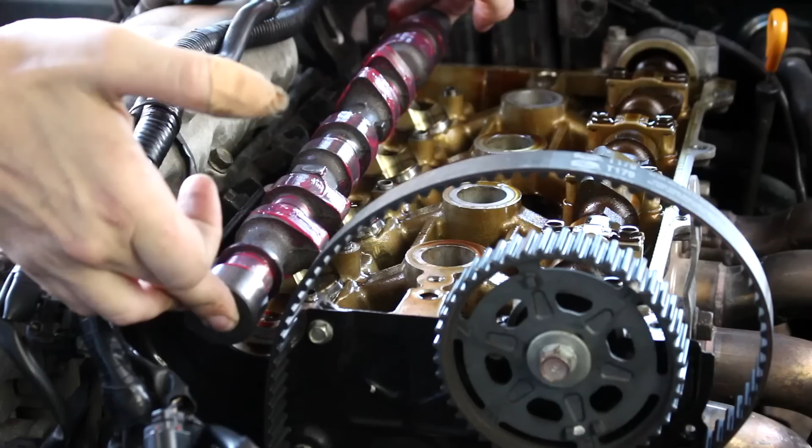So today we're testing the Exhintake cam swap, adjustable cam gears, a Squaretop intake manifold, and I have some trickery to do with a new intake after my eyes were opened and my brain was blown by the unicorn intake from last time, making an extra like 4 or 5 wheel horsepower. So we're gonna test out all that stuff today.

My goal, and it is lofty, I'm fully aware of that, is to walk off this dyno at 155 wheel horsepower. Last time I rolled off the dyno, it made 136. The reason I want to shoot for 155 is, number one, I believe this thing is a true factory freak. I know it can do it, but the Mazda Speed Miata from factory made about 153 to 155 horsepower at the wheels on a Dynojet, which is the same dyno I'm using today. So if this thing could match the factory horsepower of a stock Mazda Speed Miata, which is factory turbo for you guys that don't know, that would just be sick.

So yeah, without further ado, let's get into another long day of doing pulls.

All right, so we're getting ready for our first power pull of the day. Oh, who left the compressor on? Where is that thing at?

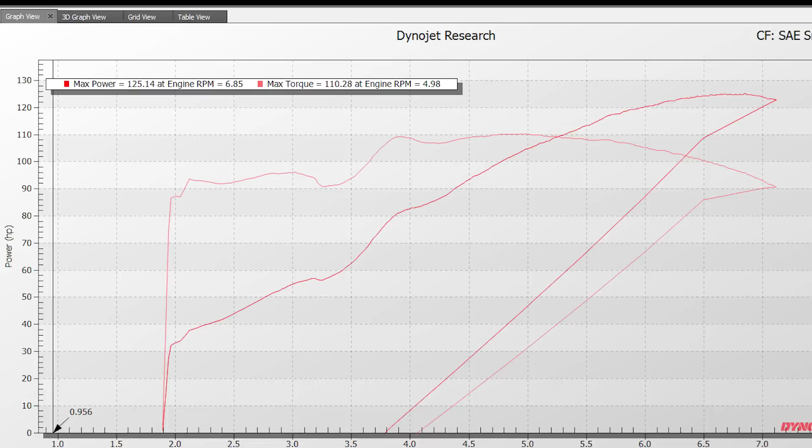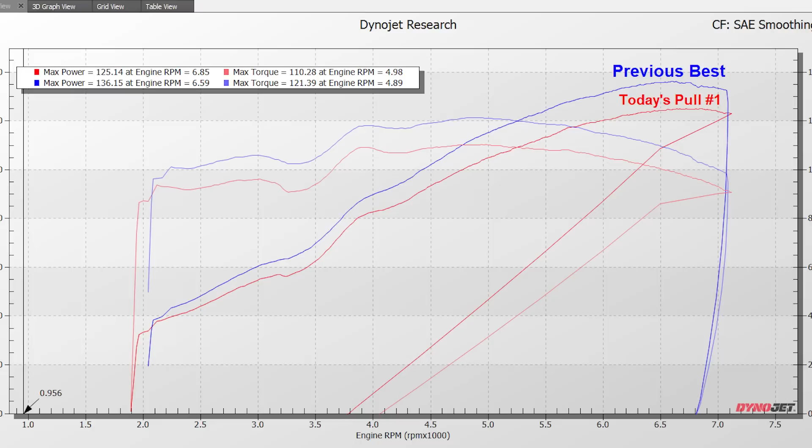So we've got a little bit of an unexpected turn of events. I was hoping to see a 6 to 8 horsepower gain just from throwing in the Exhintake cam. And what we've got here is actually a loss of about 11 horsepower and 11 pound-feet of torque at the wheels. So, as I said, nothing in the tune has changed since last time.

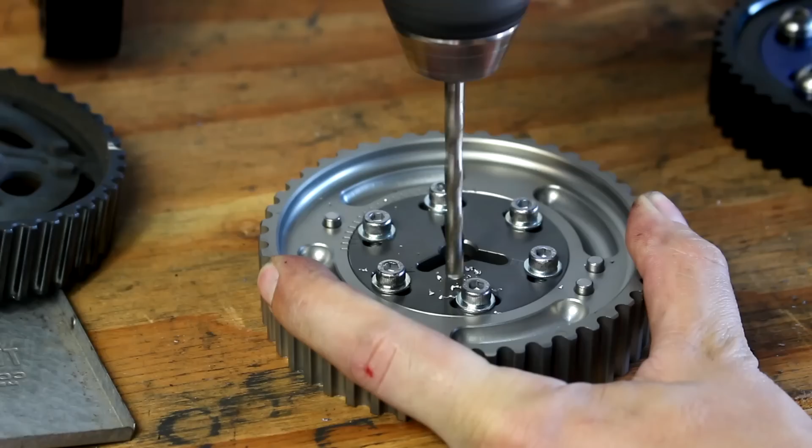So there's a couple things that could be going on. Number one, the motor could be dying. It's always a possibility, although highly unlikely. The other thing that could be going on that I'm leaning towards is, even though the cam gears are supposedly zeroed out, there are 2 variables that could be affecting this. As I showed in the cam gear installation video, I had to drill the intake cam gear for the Exhintake cam. So if I'm off by a few degrees on that hole, that will definitely affect the power.

The other thing is, on the OBX cam gear, it seems pretty generic to me. I don't think it's super R&D'd for the Miata. If this were to be off by, say, half a tooth or something, the factory exhaust cam could be advanced or retarded, which could also cause this loss of power.

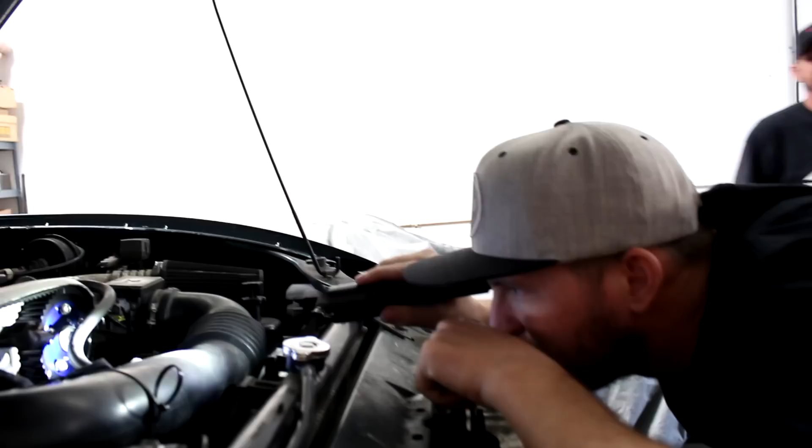All right, no need to be alarmed here, but after these initial results, the first things we wanted to check before making any adjustments were the things that could have changed during the recent installation of parts. So we checked the timing belt just to make sure that I had set it up properly, and also checked the base ignition timing, which, even though I said it once, just wanted to double check that to make sure nothing funky was going on there. And we didn't find a problem with either of those items.

So even though I wanted to save the cam gear tuning for the last part of the day, if the cam timing was messed up to begin with the installation of these gears, I had to fix it right up front. So I started playing with cam timing. Kind of the point of buying adjustable cam gears is that you really need to bring it to a dyno to tune them. The only part that sucks is I really don't know exactly how much power the Exhintake cam is gonna add once I start playing with the timing. But it seems like the timing's already been played with because it seems off, unless the motor's dying.

All right, so let the cam gear tuning begin. Now, since these gears are not marked with any numbers of degrees or anything, the system I came up with to help explain what I'm doing is: if a cam is advanced as far as the gear will let it go, I'm gonna call that 100% advanced. If it's halfway between 0 and fully advanced, I'm just gonna call that 50% advanced.

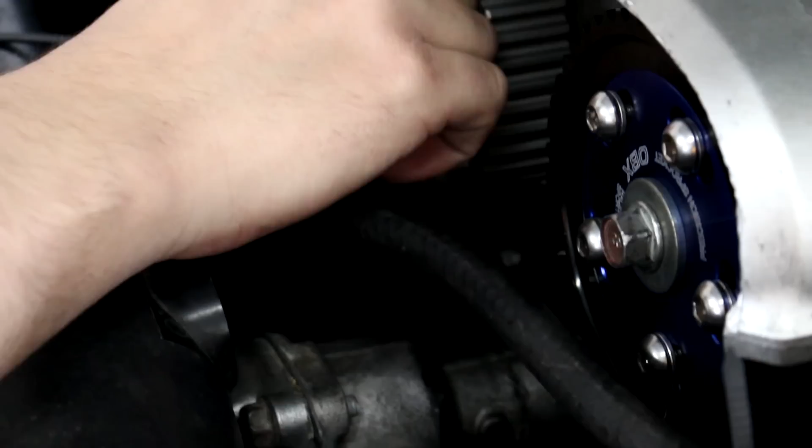So I'm gonna do several pulls here with the cams at various positions, and then I'll pull all the dyno overlays up and I'll explain what exactly happened. Something I didn't really notice at first, but I'll get into more later in the video, is when I would do repeated pulls, the car would gain a little bit of power each time. And it's not like the engine was cold on the first pull, it was fully warmed up and it would gain 1 or 2 horsepower every time.

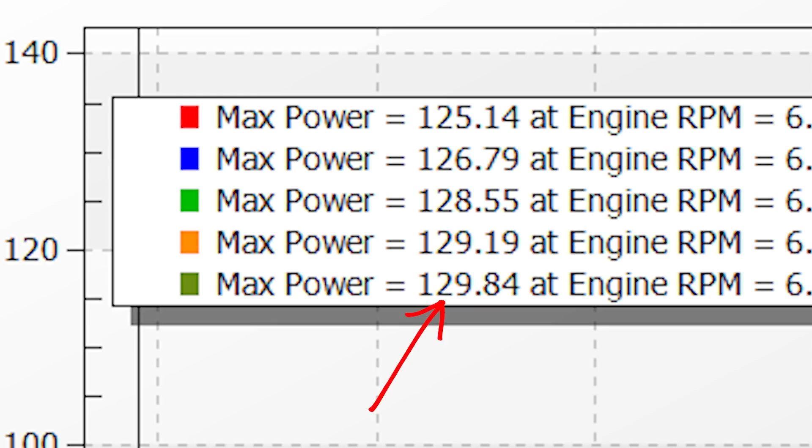So even before I touched these cam gears, the car did do a 129 wheel horsepower pull, but obviously that was still much lower than I was expecting. So let's jump into these cam gears and see what happens.

This thing's gonna sound probably pretty choppy when I fire it up right now. I'll get a little sound clip. I think it's gonna have probably a little beefier mid-range, but I don't think it's gonna do much for the top end. But hey, what do I know? I lost 7 horsepower by upgrading the cam already, so there goes my credibility.

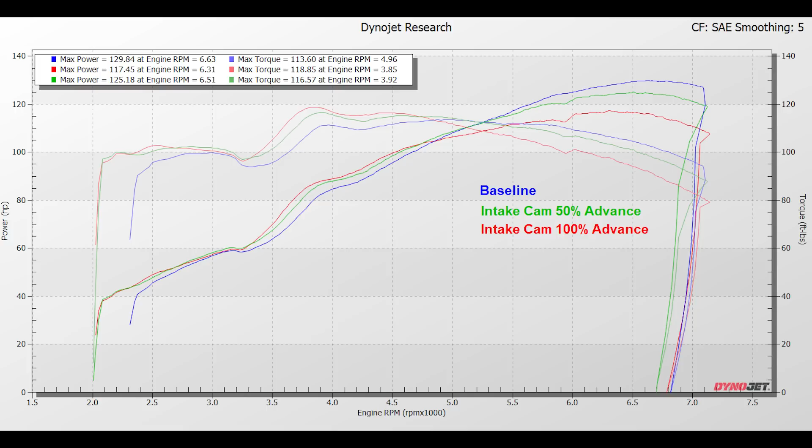But this is just a great demonstration of how adjusting the cam timing really just shifts the power band around. This green line might be preferable for someone who wants this type of power band. It gained power from 2000 RPM all the way up to about 5300, and then it only lost about 6 horsepower up top. This was pretty interesting also when I retarded the intake cam at about 50%. It lost power everywhere except above 6600 RPM. There's actually a tiny gain up there.

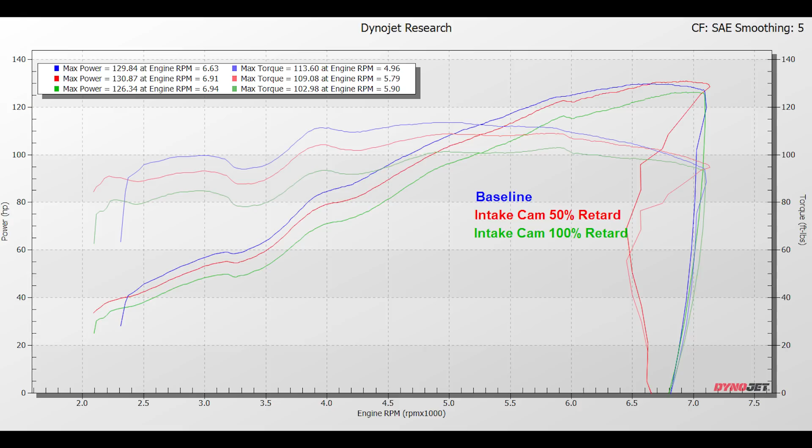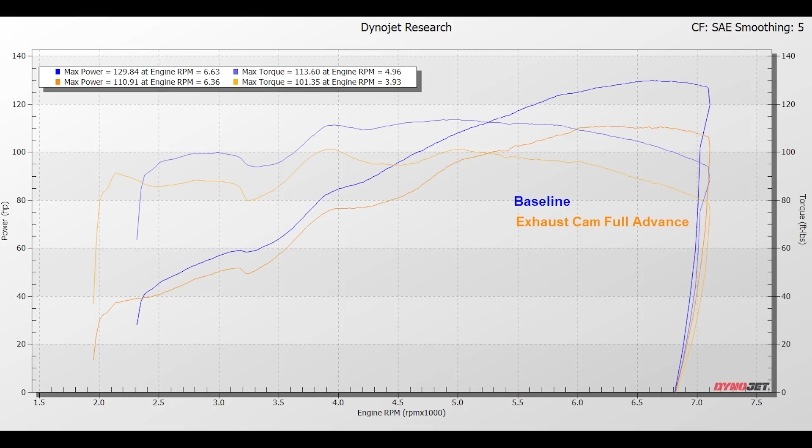And then when I went fully retarded on the intake cam, it made it so it lost a ton of power basically everywhere. Over on the exhaust cam, I don't know where the half advanced dyno went, but the yellow line here is the exhaust cam at full advance. Remember, half advance was basically just directly in between these two. There wasn't really much interesting about it, but it lost power everywhere here.

Retarding the exhaust cam really didn't seem to do too much. There was a little bit of gain with the cam fully retarded from 3500 up to about 4800, but up in the high RPM, there was not much difference in horsepower.

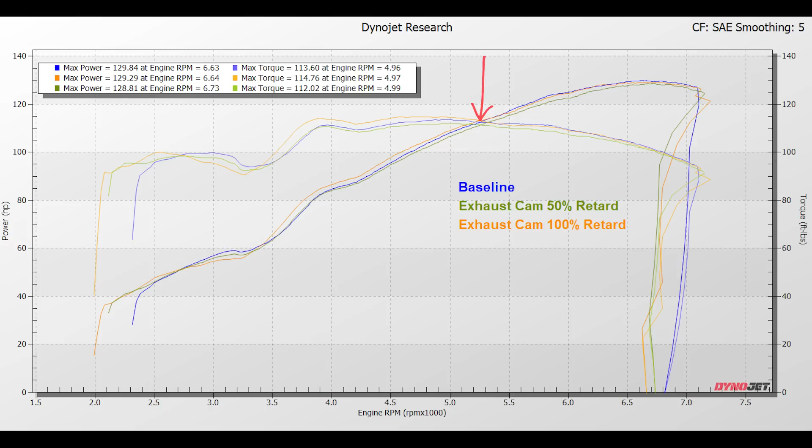Now I want to bring up something super cool. This dyno overlay here is every intake cam angle that I tried, and this chart right here single-handedly shows why VVT is so awesome. So every color represents a different cam angle, but what if we could change the cam angle based on the RPM? Watch what I do with this bright green line right here. So as you can see here, the yellow line makes the most torque in this RPM range, but all of a sudden the red line takes over.

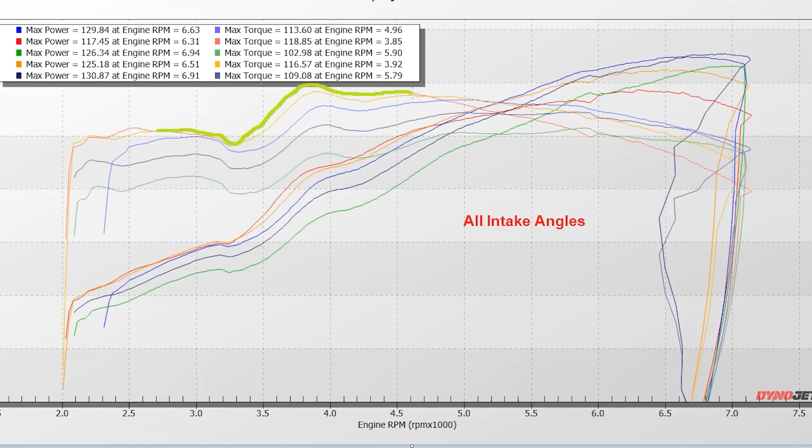So we're gonna adjust the cam angle to make sure it follows that red line. Now up here at 4800, the yellow line takes back over, so we're gonna adjust that cam back to that angle.

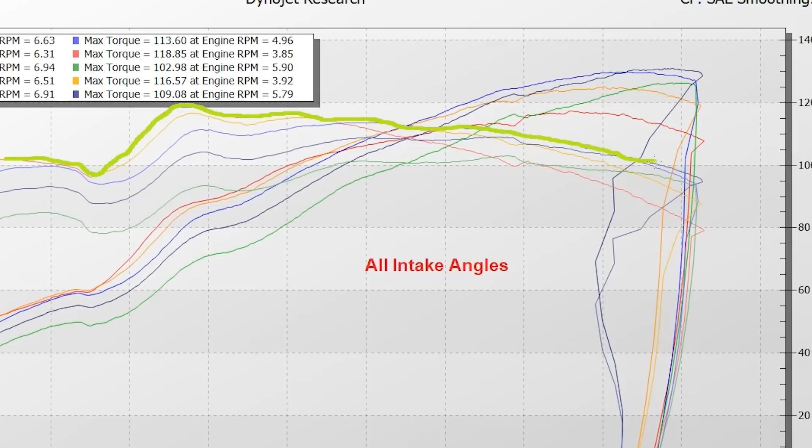But all of a sudden the blue line takes over, and then at the very high RPM, the dark blue line takes over, highest torque. So we can continuously adjust that intake cam to follow that highest torque curve, and that is why VVT is so great. Now let's take a look at all the exhaust angles and see what that looks like.

There's clearly way more power to be had by adjusting the intake cam angle, so why would you double your cost for minimal gains? Now if this engine revved a lot higher or had big cams in it, that might be a different story, but that's for a little bit later in the project.

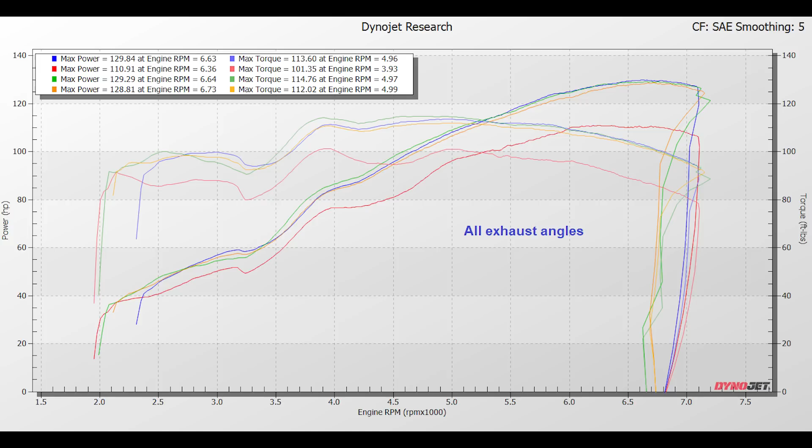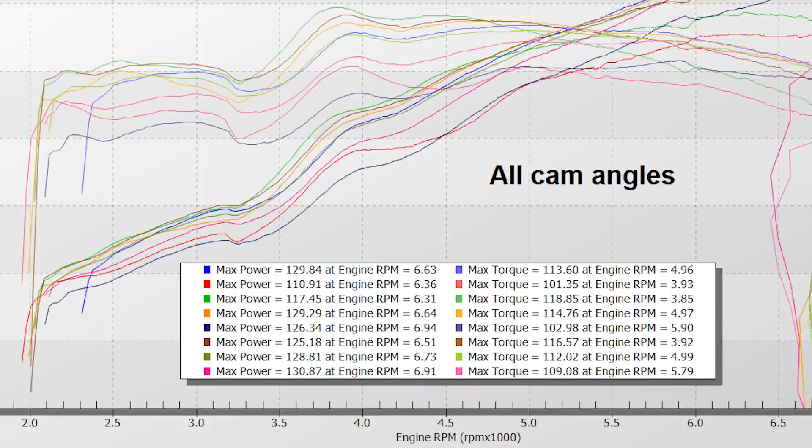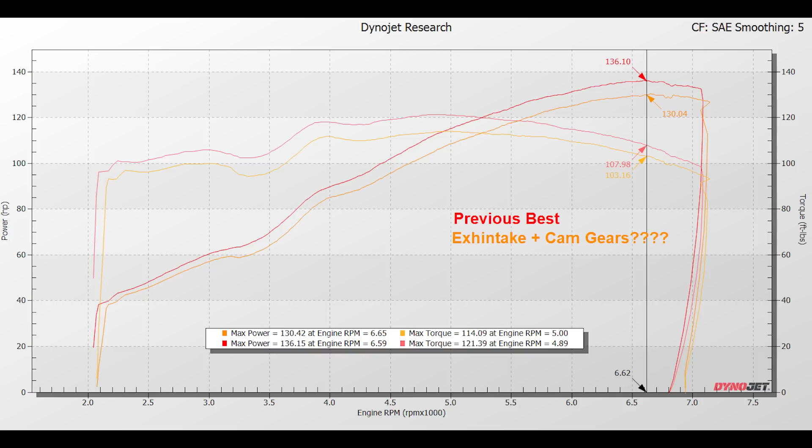Now although I was attempting to distract you guys with cam tuning information, some of you astute followers may have noticed something: where the heck is all my horsepower at? Through all that tuning, I was only able to get up to 130 horsepower. I'm still 6 horsepower short of where I was last time, and I've got a bigger cam and now optimized cam timing. Pure sadness is what it is.

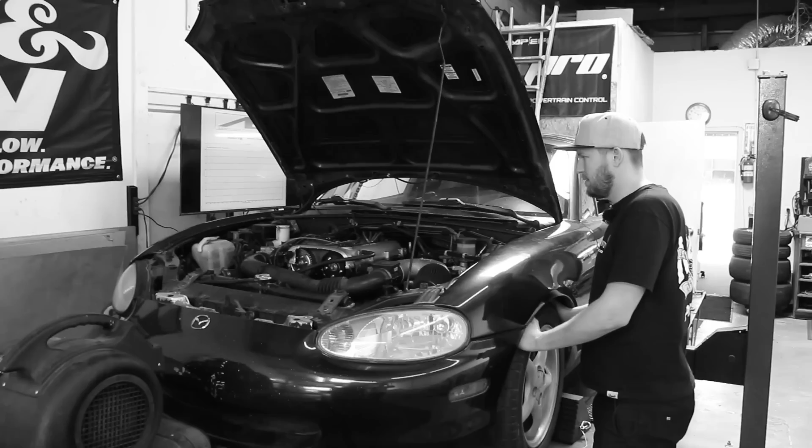Obviously I'm pretty disappointed so far. It's got a bigger cam in it, and after all the cam gear adjustments, it's making 6 horsepower less than the last time I left the dyno. Still don't know why. Shouldn't really be a cam timing issue because I just changed the cam timing all around and couldn't find a single horsepower.

I'm gonna change the intake manifold to a square top now. I really can't think of anything else to do, but push on. So I'm still optimistic we'll be at least in the 140s at the end of the day with the square top, several different intake configurations. I think we'll still make a little bit of power today, but obviously right now I'm a little bit disappointed.

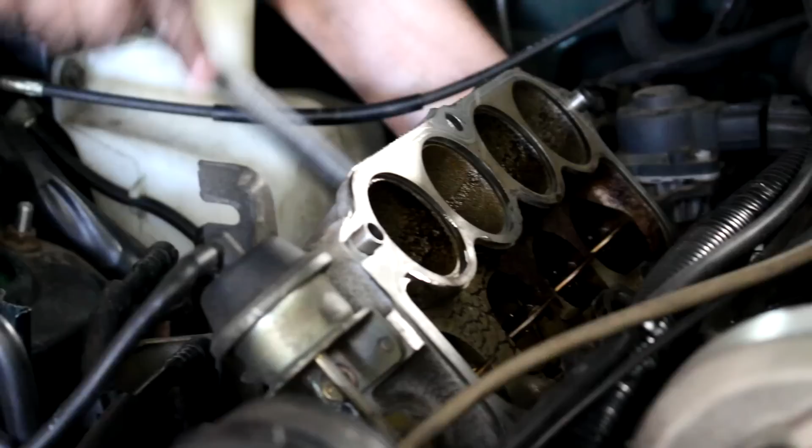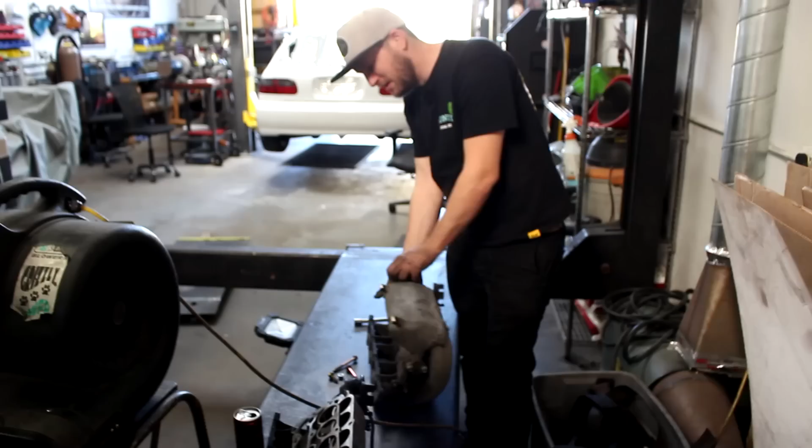Aha! I've had enough already.

I got a new goal for today. By the end of the day, I want to see this thing making 136 horsepower, fully tuned, full bolt-ons. I just want to get back to where I started, honestly. We'll see if we can do it.

130, that's what I was gonna make. What can I do other than just laugh and enjoy my time here at Advanced Engine Dynamics? Learning and not wondering anymore. Yeah.

So here's the new overlay with the Squaretop intake manifold installed, and the results are pretty much the same as all the results I've ever seen online. There's a little bit of swapping around of torque curves in the low RPM and mid-range, but above 5800 is where the Squaretop really shines, with a peak gain of about 3.5 wheel horsepower.

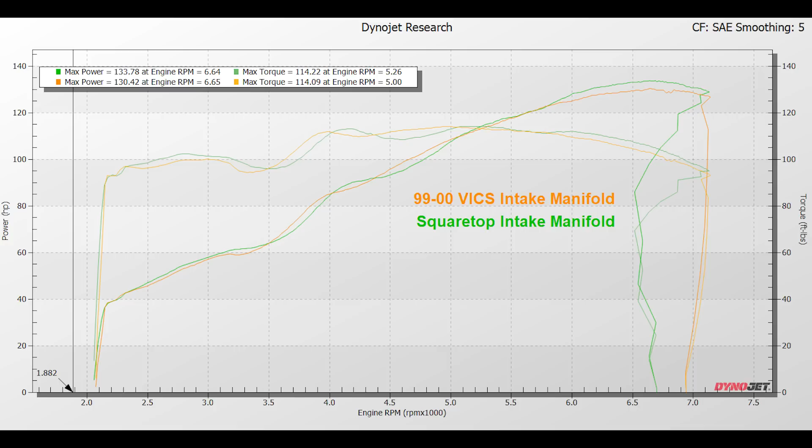And these should be accentuated if your engine makes more power, i.e. supercharged, turbocharged. The Squaretop really starts to shine in the high RPM where the flow is the highest. And although the car is making more power than ever, if I overlay my previous best, you can still see that we have not even made it back to 136.

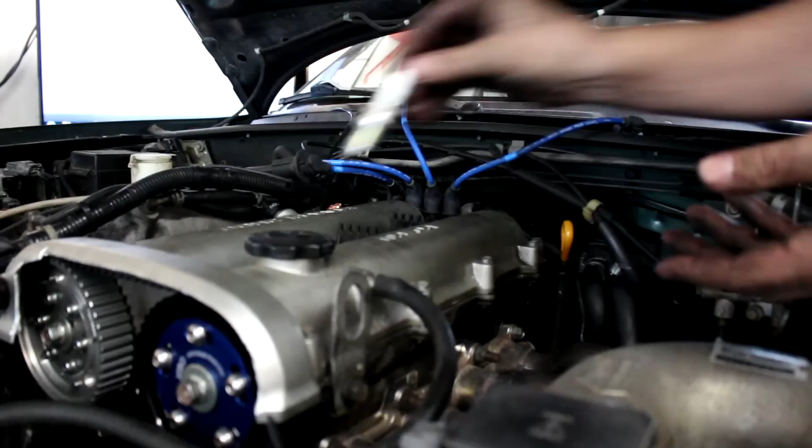So I ended up doing a little bit more troubleshooting here on the car, trying to figure out what the heck could be wrong. We made sure the dyno straps weren't too tight, the rear tire pressure wasn't low, the e-brake wasn't dragging. I put new spark plugs in the car, I gapped them. We were thinking maybe the muffler or the resonator was internally falling apart, so I even did a run on open headers.

As you can see, that was not the problem. It actually lost a little bit of power, which I'm not saying having the exhaust on adds power. I think this is more of that strange power fluctuation issue I've been having, especially today. The car would fluctuate up to 6 horsepower, which isn't normal, assuming all conditions are the same.

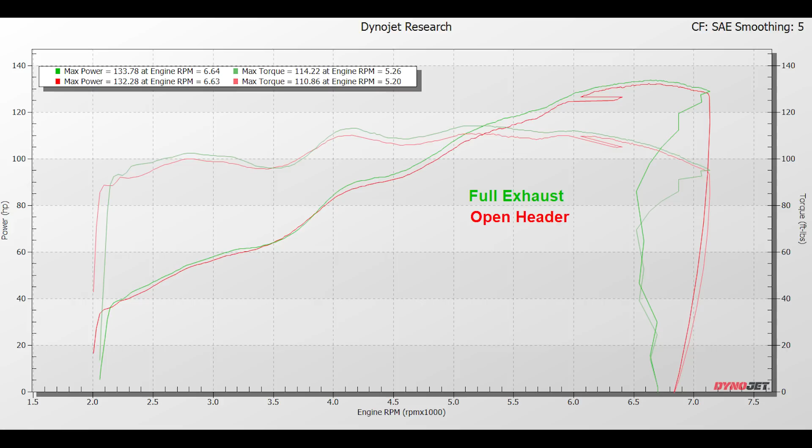At this point, I didn't think I was really going to be able to make it much better, so I figured I'd test out all this different intake piping I brought with me. I had several different elbows, pieces of piping, and configurations I wanted to try on this engine, and I did multiple runs with each one to make sure the horsepower variance thing wasn't going to affect it too much. Yes, some of them do stick out of the hood like this one here.

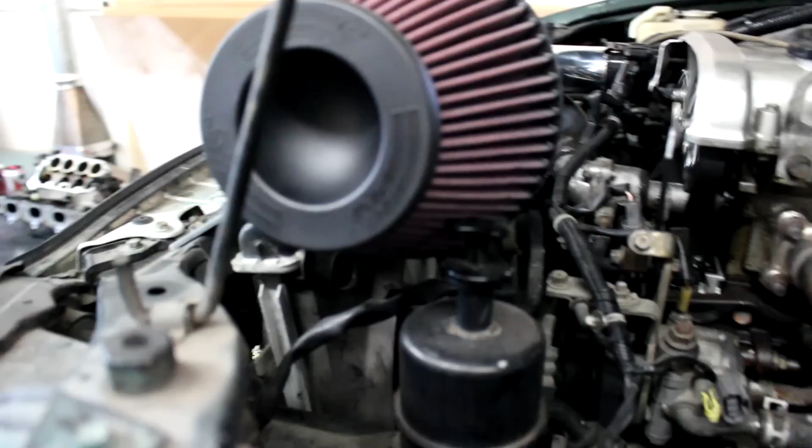I could fit this intake in if I did a power steering delete. I know a lot of people were saying to test all the intakes with the hood closed so you can see which one is cold air, but I don't really care about that. I'm only testing the flow of the different intakes. You could really build an air box and a little intake from the outside to any of these setups, but I cared about what configuration is going to flow the most air. I don't care about what's going to keep intake temps low, since that's also going to be affected by whether the car's moving or not. So yeah, that's not part of this test.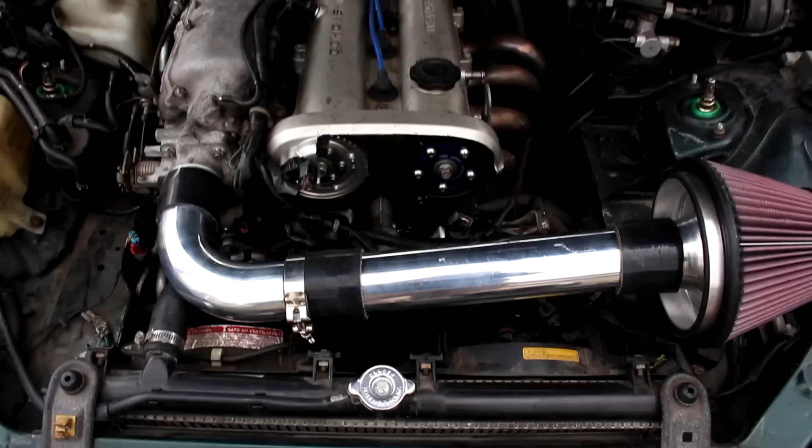This is the first configuration I tested, and supposedly, according to an online post from 949 Racing, it's the optimal Miata intake system, minus one little detail - mine is a little too long. You want this large radius bend coming off the throttle body, and the total distance from the throttle plate to the end of the piping where it opens into the filter needs to be about 21 inches on a 1.8 liter, or about 19 inches on a 1.6. Mine here is about 27 inches. So actually, if I cut it down, I might be able to fit the filter with the power steering pump reservoir - I might try that later.

I also tried this configuration here, which is actually the correct intake length, but it has the less optimal tight silicone bend going into the throttle body. So those two things might offset each other by a little bit.

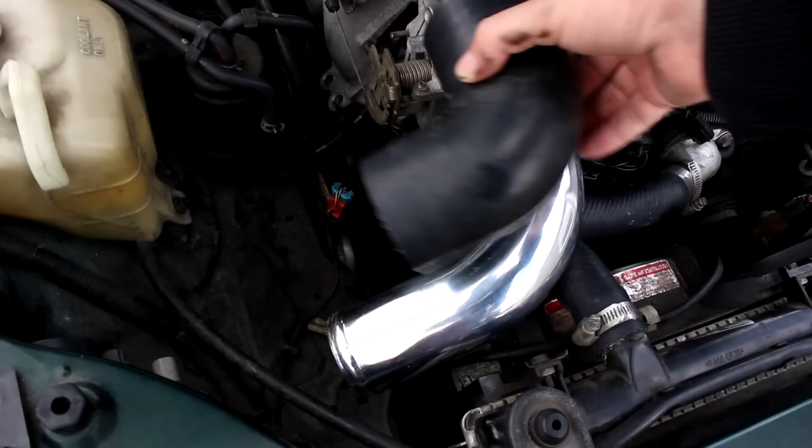Then I tried this setup, which I like because it's really compact, and I wanted to see just how much of a difference there was in flow compared to the longer tube intake styles. A better way to set this up might be with the larger radius bend off the throttle body, but I'd have to cut that down to fit the air filter in that area behind the headlight. This is another intake setup you may have seen on Miatas.

I did not test this one, but apparently it's just as good or better than the large radius bend that goes across to the headers. You still have the long sweeping bend, and as long as you make that intake length correct, you should be able to get pretty much the most power you can from an intake.

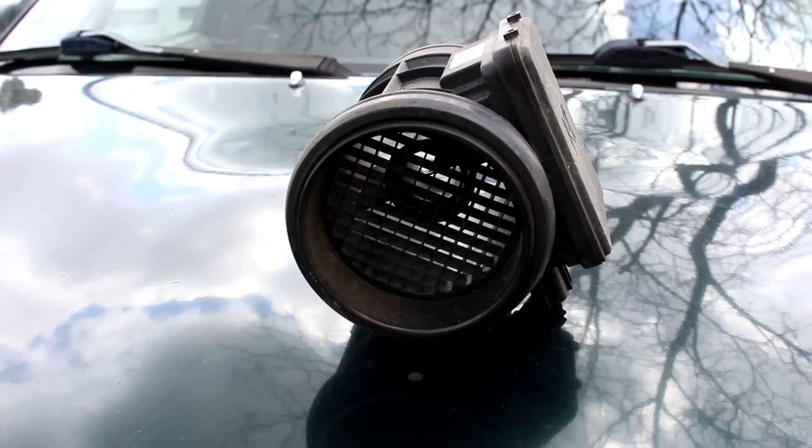Since I'm on a standalone, I didn't have the mass airflow sensor in place for any of these tests, but it's already been tested before that there's not a significant pressure drop across the mass airflow sensor, so you're not gaining a bunch of horsepower by deleting the MAF. That's different on a 1.6 liter, where the AFM or airflow meter is quite restrictive.

So anyways, let's check out the results from the tests that I did. All right, here's a fresh baseline pull with the current conditions in the shop at 132.7 horsepower. The first test I'm going to do is the little shorty intake that kicks right off the throttle body.

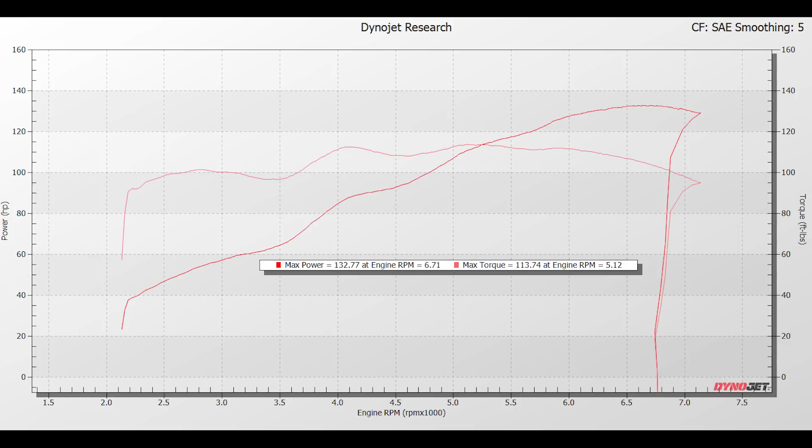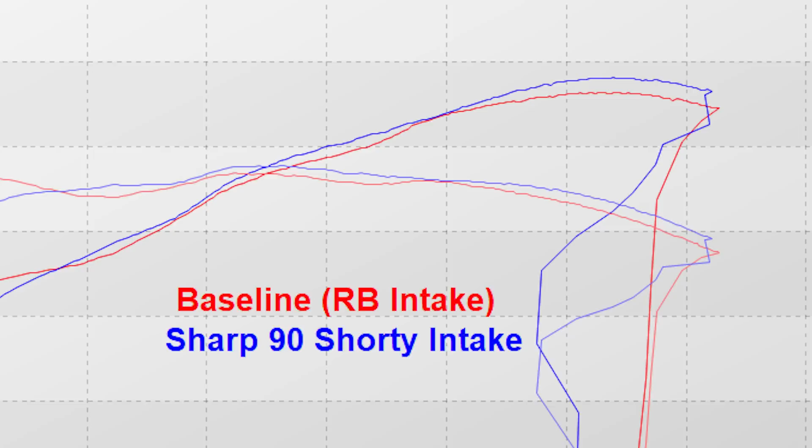There seems to be a pretty big gain in the low RPM, although I'm not too concerned with this area down here because I don't use it very often. It did lose the odd little bump in torque here, which isn't from a Helmholtz resonator because the NBs don't have one, but it's some sort of resonance with the stock intake tube or something like that. Where it starts to count, basically everything above 4,400 RPM, there's a jump of 2 to 3 foot-pounds of torque, and up in the high end, it's good for almost 4 horsepower at the wheels over the Racing Beat intake.

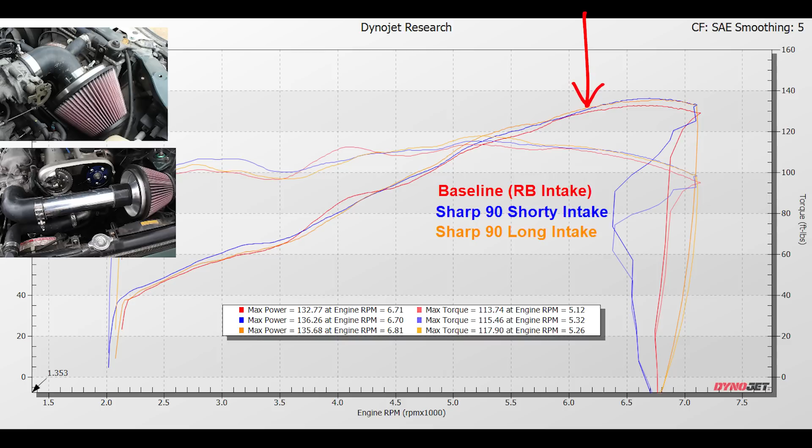This is the run using the long intake and the sharp 90-degree bend, and it did gain power from about 4,200 up to about 6,200, and then in the high end there's a tiny bit of a loss, but I'd call that negligible. I've seen variances bigger than that between the pulls, so I don't think that's anything to write home about.

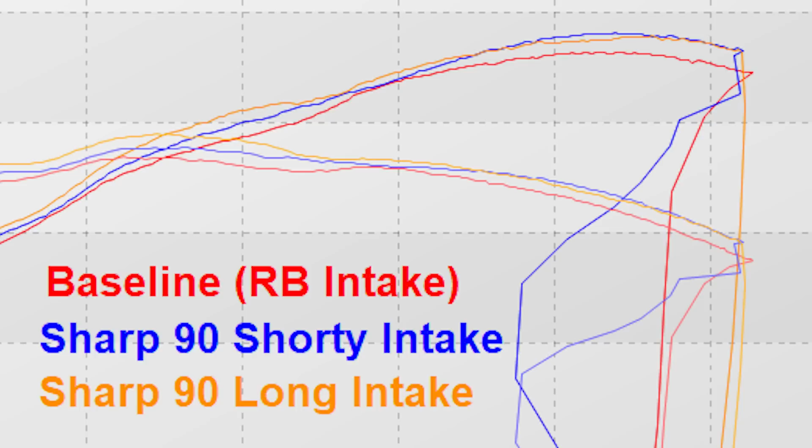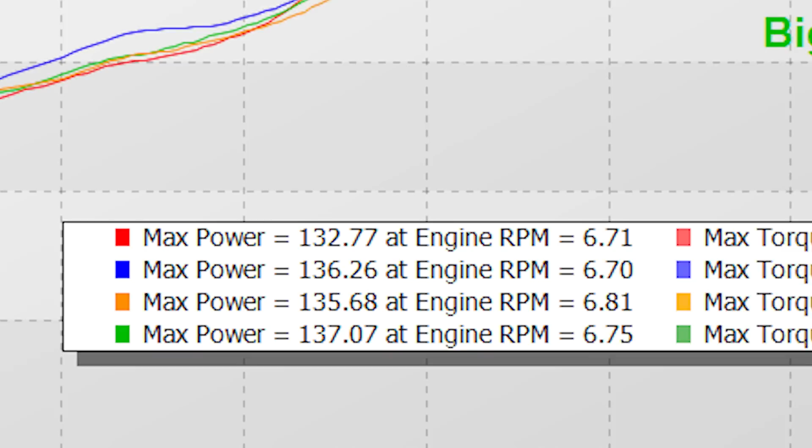And then the clear breadwinner was the quote optimal intake. Even though it was a few inches too long, it did make the highest power of the day at just over 137 wheel horsepower, with gains over all the other intakes above 5,600 RPM.

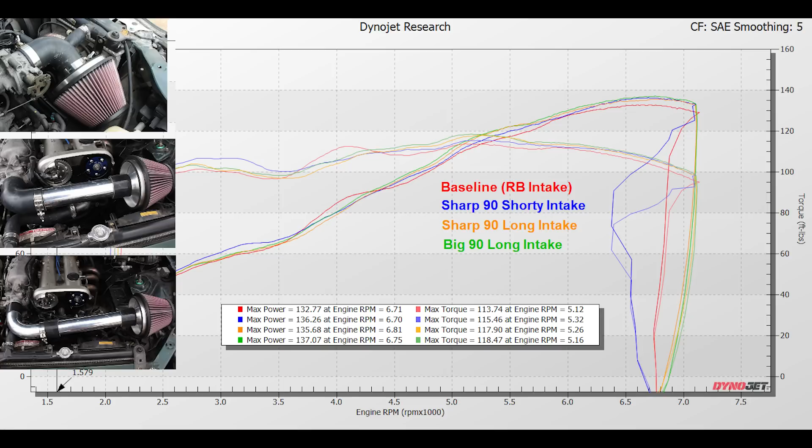So I may optimize this further later, but obviously there's some kind of issue going on with the car, and I didn't want to spend a ton of time doing this. But the intake I'm going to leave on for now is actually the sharp 90 off the throttle body. It did make over 136, and that's nice and compact and easy to just run with for now.

And the way that first dyno looked of the day, it was like losing the same amount of power throughout all the RPM. It almost looked like the AC was on, which it was not, but I thought, hey, what if the power steering pump is eating itself and I could just take that power steering belt off and there comes all my horsepower. So that was the next test that I did, and here are the results.

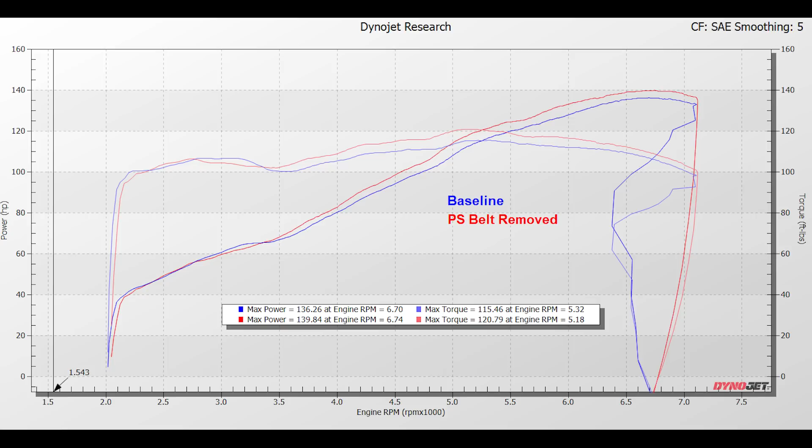It was not the shockingly massive gain that I was hoping for, but it was worth about 3 wheel horsepower at the top end. So for the rest of the day, just desperate to break the 140 barrier, I left that belt off and continued on to some further cam gear tuning.

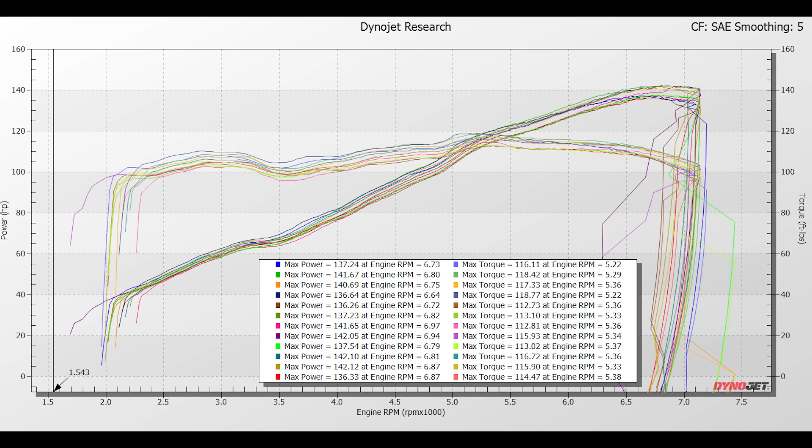And when I say further tuning, I was gonna break 140 whether that engine wanted to or not. And I did end up breaking 140 with a peak power run of 142.12 wheel horsepower. So here's the comparison of the best pull in the morning compared to the final power pull of the day, for a peak gain of just over 12 wheel horsepower.

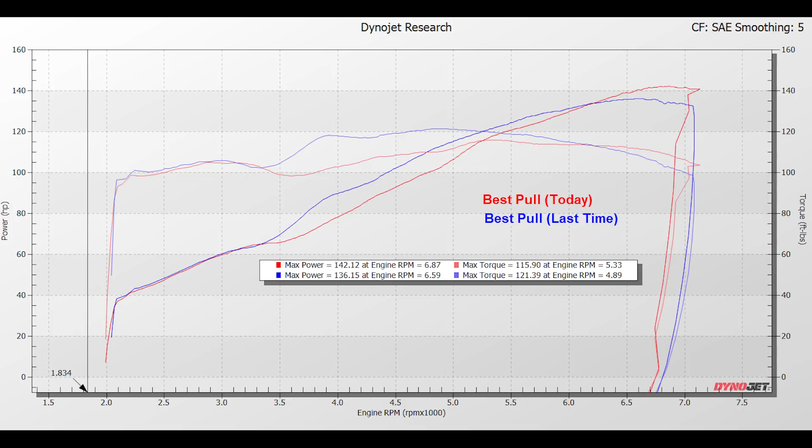So yes, the car is faster than when I came in, and yes, it is making the most power it ever has. But I'm still a little confused. Here, take a look at this. This is the best power pull of the day compared to the previous best pull that the car did before.

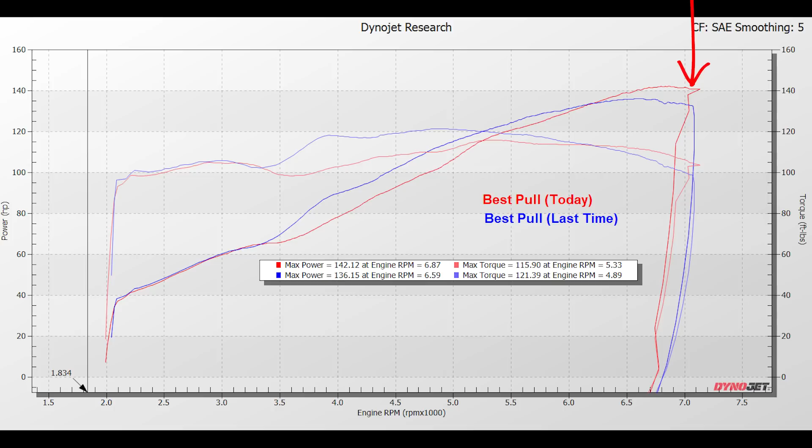So above 6,300 RPM, it is making a little bit more power, but at the cost of 16 foot-pounds of torque at 3,900 RPM. To give you an idea of how much power loss that actually is, here is the car's bone stock dyno versus today's best pull.

Now let's have a look at everything below 4,600 RPM. The car is basically making stock power below 4,600. In fact, at 3,700, it's actually making 3 foot-pounds less torque than stock.

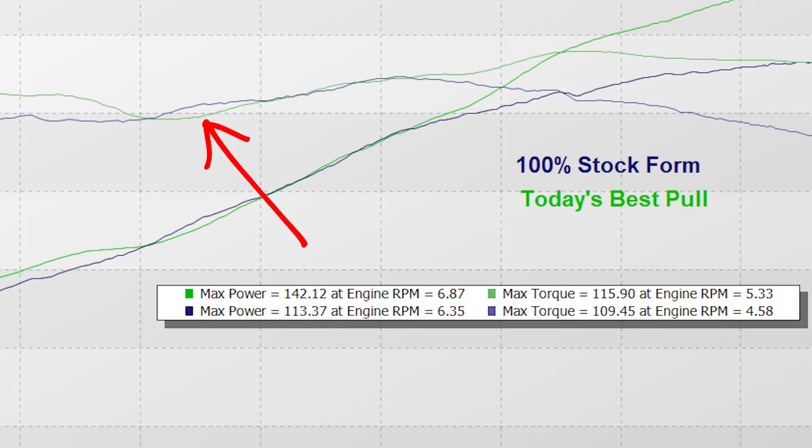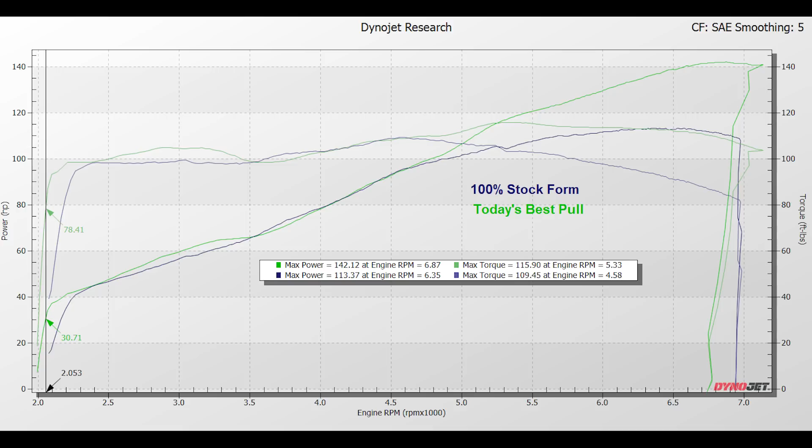What? There's no reason that with a better intake manifold, a better cam, optimized cam timing, and an unarguably better intake system, that the car should be making 16 foot-pounds of torque less. That is a 15% drop in torque.

Well, we made more power than before. If that torque curve was up where it should be, I think it would be over 150 right now. It looked familiar. Just don't know where the power is going. Maybe I'll figure it out someday.

Okay, so what do you guys think about everything that happened in this video? Obviously the car has come a long way from when it was stock, and I really think I was able to collect some good data today, because I started with 129 horsepower, and then got to apply all these mods and see how they affected the engine, and it did make a good chunk more horsepower.

But obviously there is something going on with the car. So what I want you guys to do is drop down below in the comments what you think the issue might be. I have no idea what it is yet, but my next step is to jump into that thing and start hunting for what could be causing this problem.